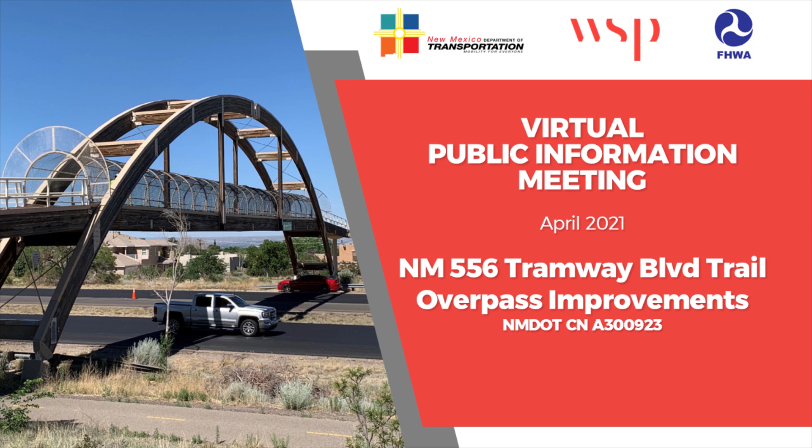The New Mexico Department of Transportation has partnered with an engineering firm called WSP to complete preliminary and final engineering on these timber bridges along New Mexico 556.

The project is located along Tramway Boulevard in Albuquerque, New Mexico. The project limits are from milepost 11.6 at Comanche Road to milepost 14.6 at Copper Avenue.

After I describe the existing conditions of the bridges in the next few slides, I will go in more detail as to what bridge rehabilitation and preservation is and what rehabilitation work and preservation work will consist of for each of the bridges.

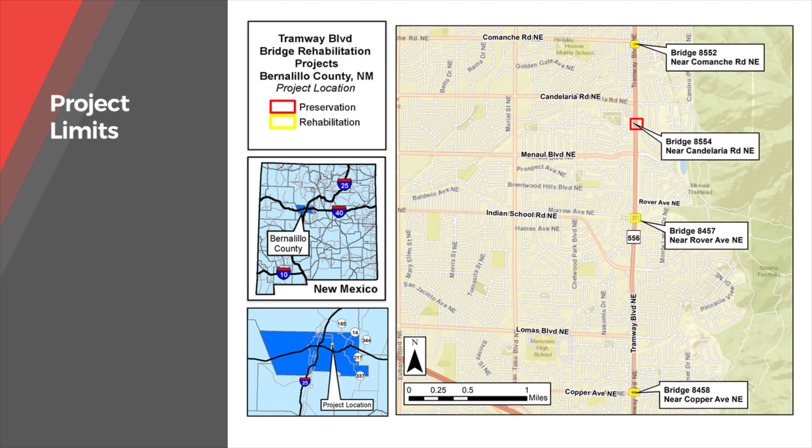So let's first talk about the existing conditions of the bridges. 3 of the bridges have timber decking on them. The timber decking has splits and checks, minor decay, advanced weathering, and has become uneven due to years of wear and tear. Some timber deck planks and bolts that anchor them are loose in isolated locations throughout. The existing timber decking on each of the 3 bridges is in fair condition.

The existing pedestrian screening fence on all 4 bridges is loose and sagging in some isolated locations and also cut in some locations. Overall, the fence is in satisfactory condition.

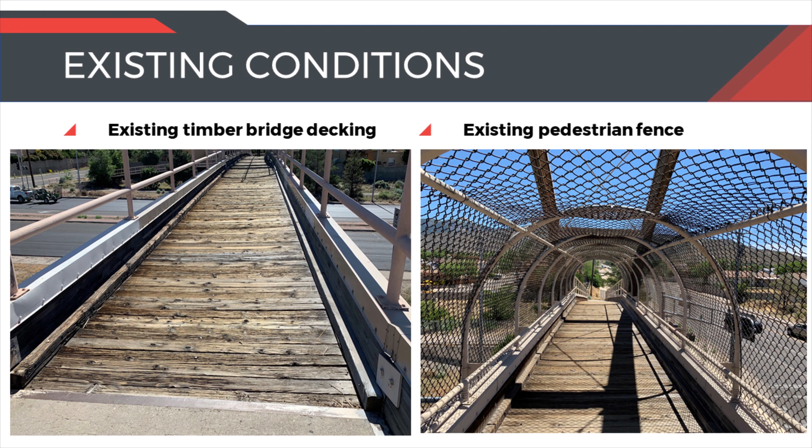The concrete abutments and piers have random cracking with some minor delamination and spalling occurring in isolated locations. Overall, the piers and abutment concrete are in satisfactory condition.

The steel bridge elements, such as the railing, steel plates, steel pins, and bearing supports, have paint flaking and some minor corrosion occurring. Ultrasonic testing of the steel plates and steel pins was conducted recently in several locations along the bridges. The results of the ultrasonic testing deemed that the existing steel plates and pins are in satisfactory condition and no defects were found.

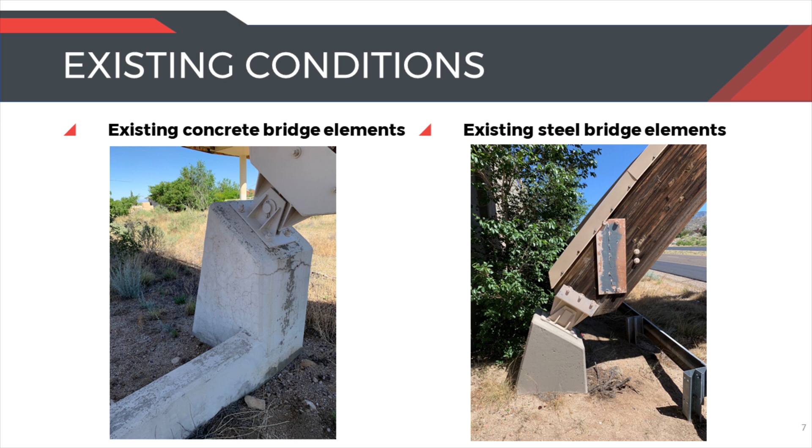All 4 bridges are comprised of timber glulam beams, as shown in the photos. These glulam beams are the main carrying members for each of the bridges. Glulam beams are made up of multiple layers of solid wood lumber bonded together with high strength adhesive to form a single structural beam.

The existing glulam beams have some minor weathering, decay, and surface checks. Ultrasonic testing of the glulam beams was conducted recently in several locations along the beams. The results deemed that the existing glulam beams are in satisfactory condition, and no defects or decay were found.

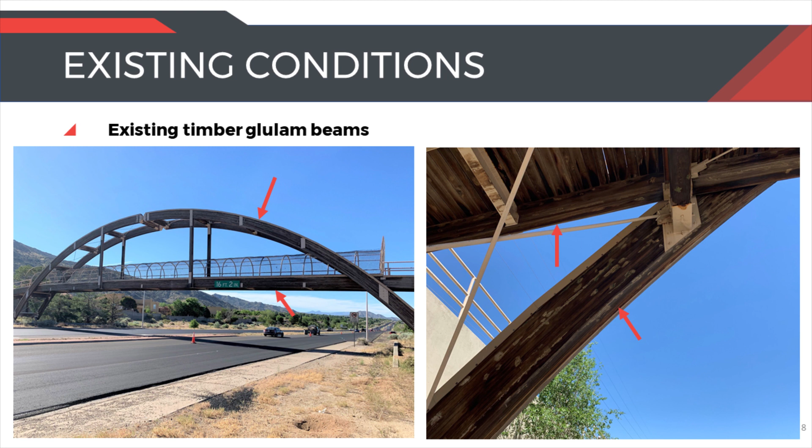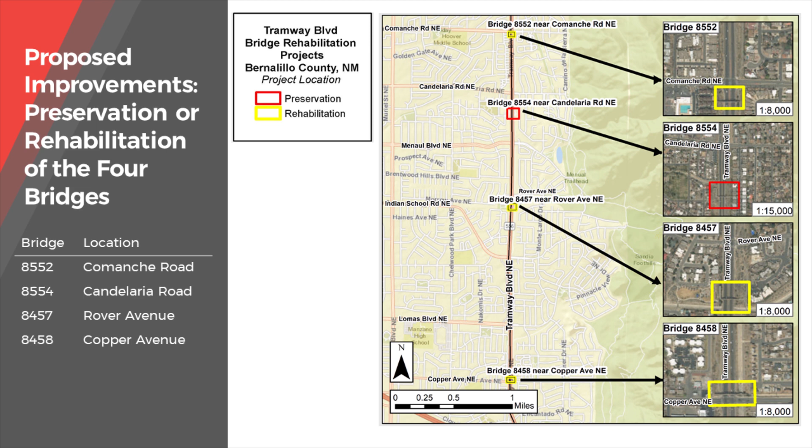Next, I will talk about what the proposed improvements will be for this project. As mentioned earlier and shown in the slide, 3 of the bridges will be rehabilitated while 1 of them will have preservation work done. You may be wondering, what is the difference between rehabilitation and preservation, and what does this work consist of?

Bridge preservation, as defined by the Federal Highway Administration, is work done to prevent or reduce the deterioration of a bridge, restores the function of the bridge, and improves its condition. It also extends the bridge's service life. Examples of bridge preservation include repairing concrete bridge elements and repainting steel bridge elements.

Bridge rehabilitation, as defined by the Federal Highway Administration, is work required to restore the structural integrity of a bridge and to correct major defects and deterioration a bridge may have. In simple terms, bridge rehabilitation will involve more work to restore the bridge or bridges versus bridge preservation. Examples of bridge rehabilitation include replacement of the bridge deck.

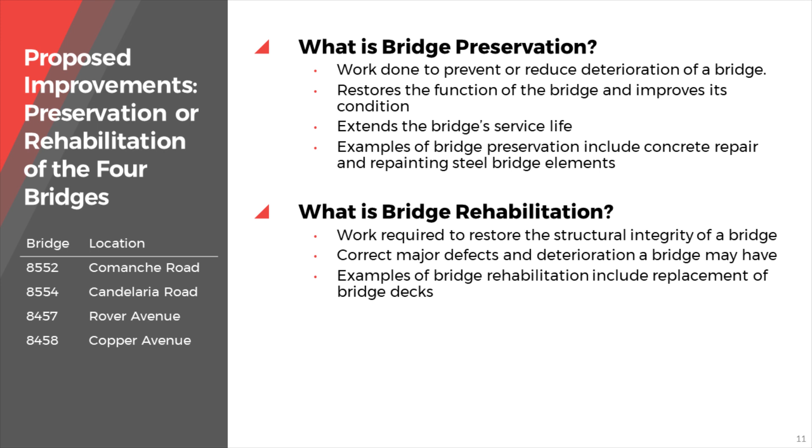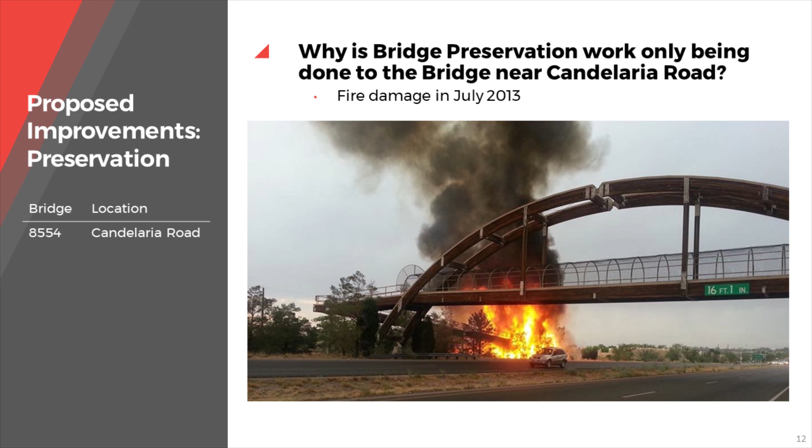Some of you may recall back in 2013, the bridge near Candelaria Road caught fire and destroyed the west approach ramps of the bridge. The rest of the bridge, such as the portions over Tramway Boulevard and the east approach ramps, were not damaged by the fire. After the fire, the NMDOT determined that the bridge could be rehabilitated to restore its structural integrity.

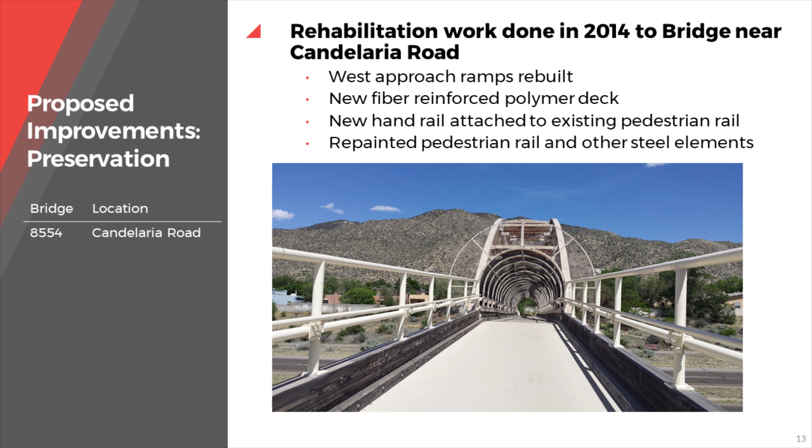Other work done to the bridge in 2014 included the installation of a new handrail onto the existing handrail in order to meet ADA requirements. And the existing pedestrian rail and other steel bridge elements were repainted.

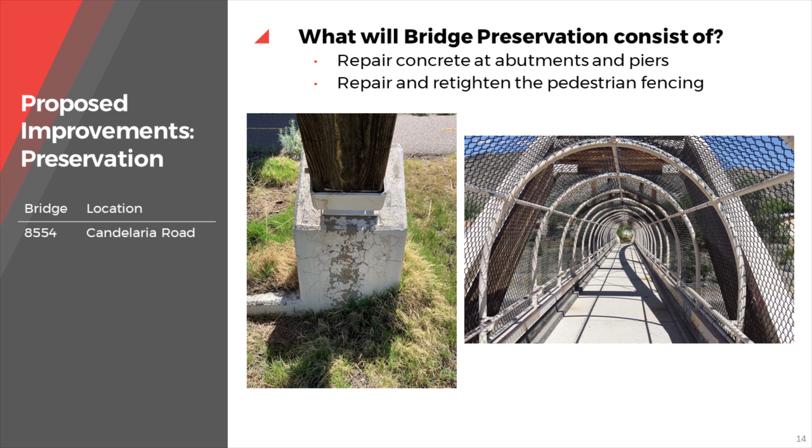Even though the bridge near Candelaria Road was rehabilitated in 2014, it does need some minor work done to it today. As part of this project, the concrete at the abutments and piers have minor cracking and spalling and will be repaired. The pedestrian fence is loose and sagging in some areas and will be retightened.

The bridge near Candelaria Road has several exposed steel plates, nuts, and bolts that are exhibiting some paint flaking and minor corrosion and will be repainted to preserve them. This concludes the work that will be done to the bridge near Candelaria Road under this project. Next, I will talk about the work required for the 3 remaining bridges.

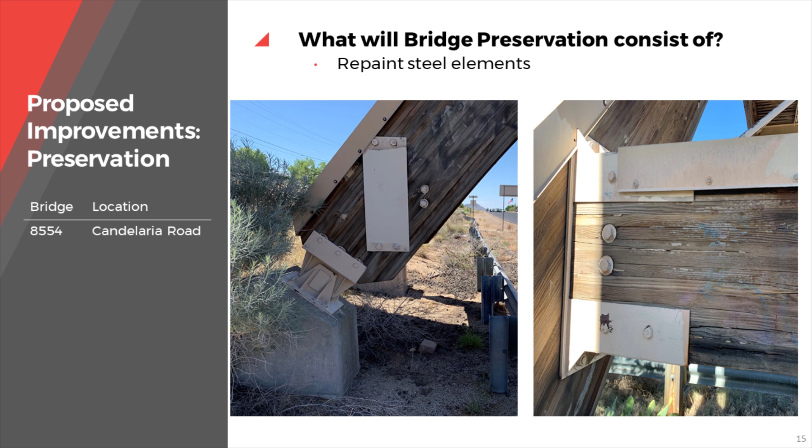The NMDOT has determined that the existing timber bridge decks need to be replaced on the 3 remaining bridges. As mentioned earlier, replacement of the bridge decks is an example of bridge rehabilitation. The timber decking on the 3 bridges will be replaced with a fiber reinforced polymer deck, similar to what was done on the bridge near Candelaria Road in 2014.

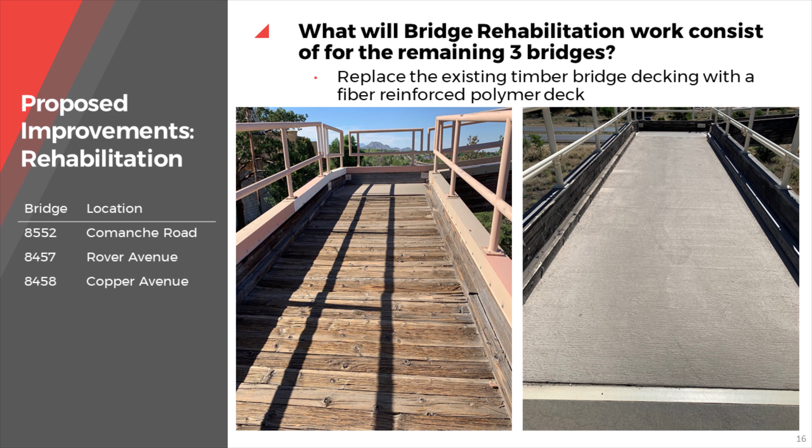Because the NMDOT has received numerous compliments on the fiber reinforced polymer decking that was used to replace the timber bridge deck on the bridge near Candelaria Road, fiber reinforced polymer decking will again be the material choice for replacing the decks.

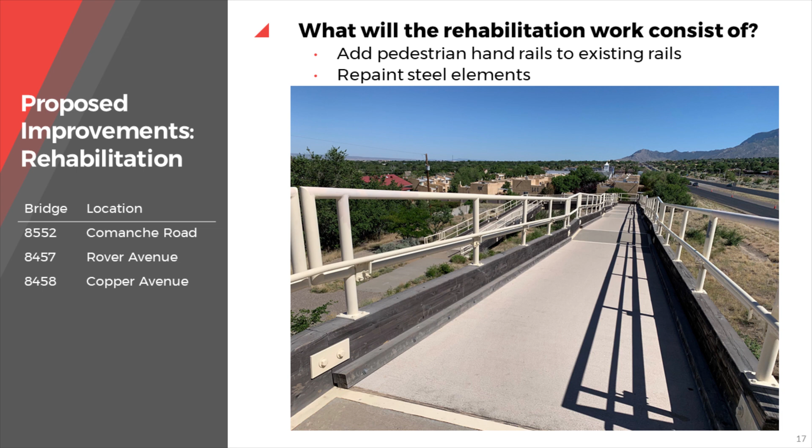A new handrail will be installed onto the existing pedestrian rail in order to meet ADA requirements, similar to what was done to the bridge near Candelaria Road. The pedestrian rails and exposed steel plates, nuts, and bolts are exhibiting some paint flaking and minor corrosion and will be repainted to preserve them.

The concrete at the abutments and piers have minor cracking and spalling and will be repaired. The pedestrian fencing is loose and torn in some isolated locations. It is also sagging in some areas. The pedestrian fencing will be repaired and retightened.

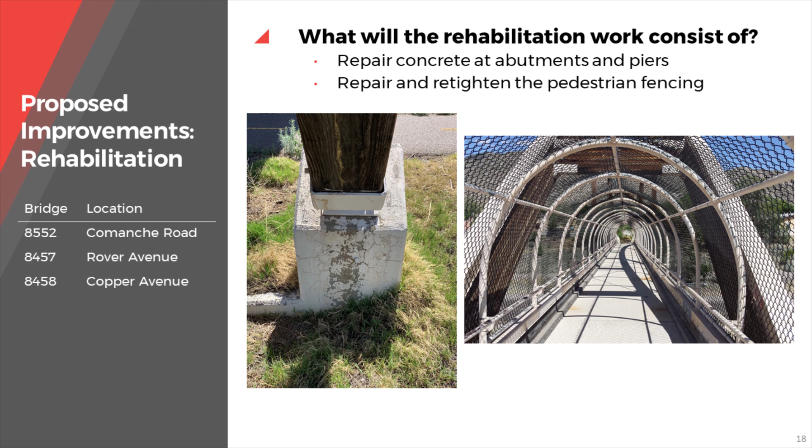Replacement of the timbered bridge decks will require the existing bridges to be temporarily closed so that the bridge decks can be replaced quickly. It is anticipated that one bridge will be worked on at a time. Prior to closing any of the bridges, advanced signing will be placed to help pedestrians safely get from one side of Tramway Boulevard to the other.

Vehicular traffic will be reduced to one lane while the deck is being replaced. Only one lane will be dropped at a time, and it is anticipated that the deck replacements will only occur during daylight hours. At nighttime, all lanes in each direction will be reopened so that there are no traffic disruptions at night. Detour routing for users of the multi-use trail will be provided when required and will occur along existing pedestrian routes.

Crossings will occur at the nearest signalized intersection when the bridge is closed. Bicycles using the tramway shoulder will be maintained using channelized lanes through the construction zone as required.

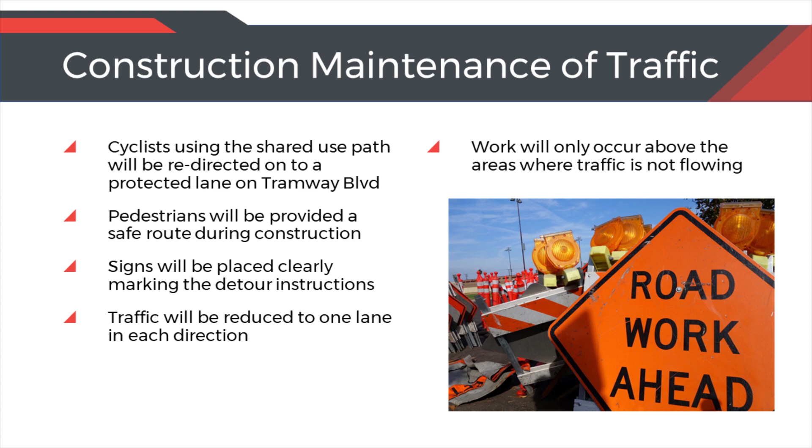Great information. Thank you, Ray. Next, I will talk about the project schedule and next steps.

This project began in winter 2020 with preliminary design. The design looked at the existing conditions and potential options for making improvements. To further the project, we are now hosting this virtual public project video presentation on the NMDOT website to present the project to you so that we can capture your feedback. That feedback will then be taken into account as we move from the initial engineering design, which we started, and moving into the final design for the project.

We anticipate the final engineering design to be completed this summer, with construction anticipated to start in winter at the end of 2021 or the start of 2022.

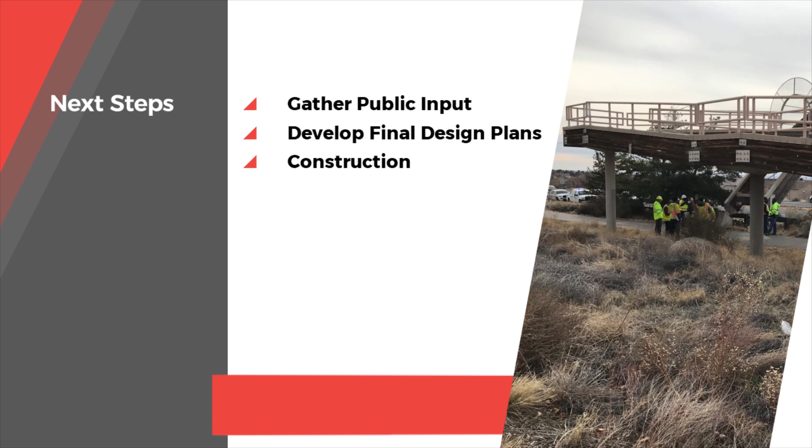2021-2022. Well, now that you've heard from us, we'd like to hear from you. We would like to answer any of your questions, be informed of any of the feedback or input that you have on the project. And to do that, you may email me at